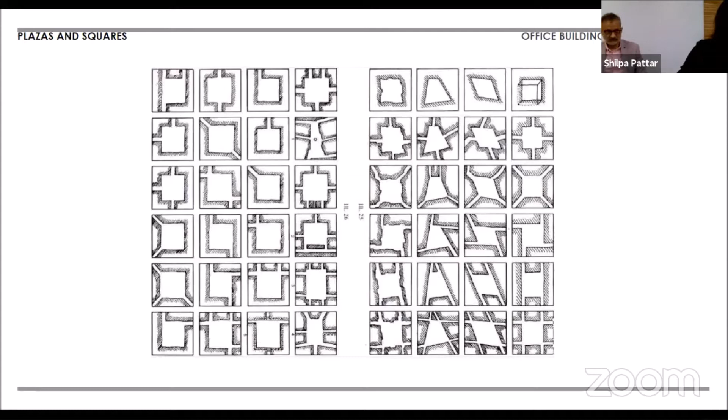It is reminiscent of old European town squares that house various activities like a borough market, pop-up food stalls, street performances, musical bonanzas, sport and cultural events, mini banquets, as well as informal outdoor Indian bazaars. Old European town key features like clock tower, town squares, sports zones, high streets, outdoor dining, and garden spaces were part of our design ideations. Sketches that were to scale with workable floor plates and areas are displayed here.

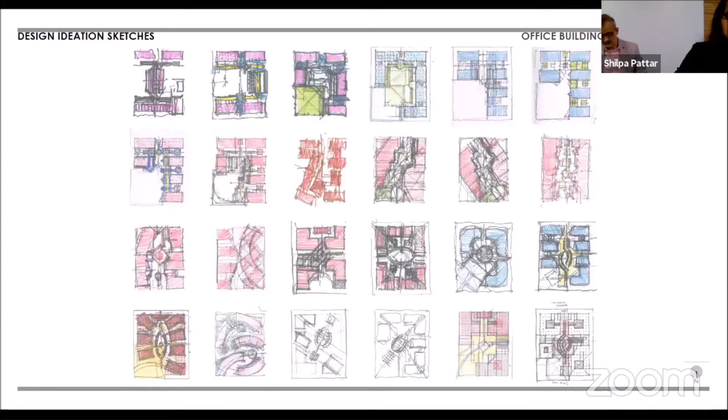So the final strategy consisted of 12 building blocks with varying heights, different facades, and peripheral buildings overlooking the central building terraces and buzzing activities on ground level as planned. That's the landscape master plan, capturing all the essence and medieval elements, textures, colors, and activities that we intended to involve.

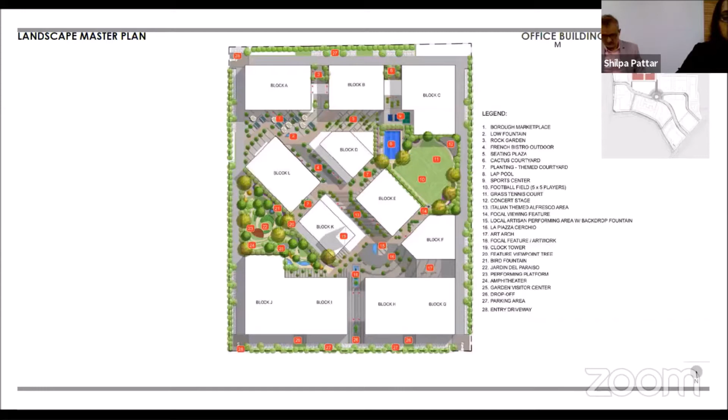So the site layout and the stats: located in the ETV campus Bangalore, the site area is around 14.57 acres and the super built-up area is around 2.4 million square feet, consisting of 12 blocks of varying sizes and height, the maximum being 1 to 10 floors. The vehicular movement is restricted to the periphery, which is a one-way loop, consisting of 5 ramps for employees that enter to the upper basement, and individual building blocks have drop-offs for VIP and specially-abled on the periphery.

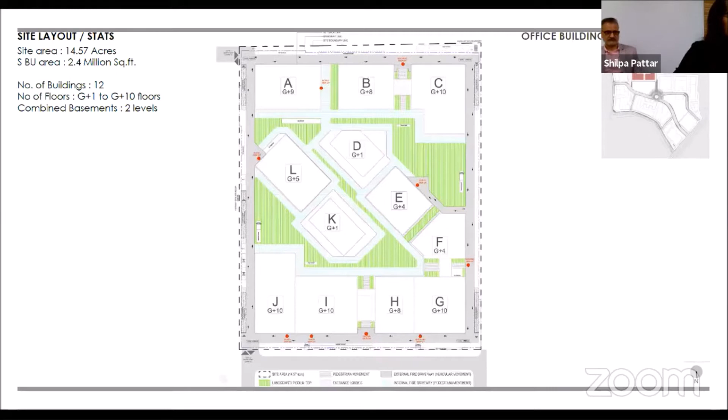The central spaces and space between the building blocks are dedicated to pedestrian movement and various activities along with fire tender movement. All the building blocks are interconnected with steel bridges from 2 floors and above on alternate floors, which was a fire requirement and which helps evacuation during fire emergency and creates an interesting multi-level movement pattern between the building blocks.

Block A, B, and C combined together generate 0.8 million square feet, which was phase 1 of the project, to be completed within 2 years of the approved concept stage.

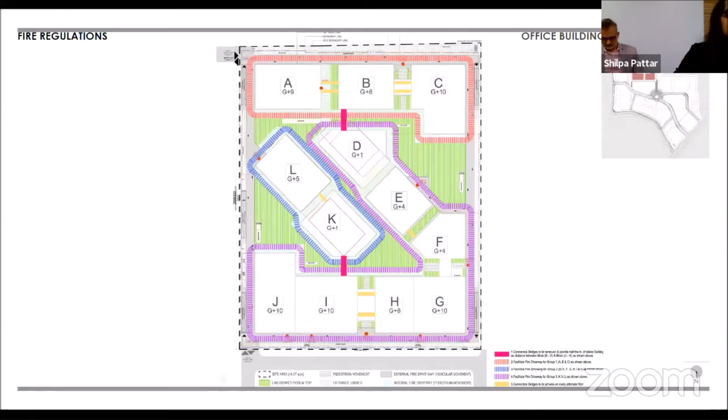Each block's floor plate size varies, and hence the placement of cores varies. Buildings with comparatively lesser floor plates are holding corner cores to provide efficient floor plate for office space. The lift cores are built in RCC, fire staircase in RCC, and the central stairs in checker plate.

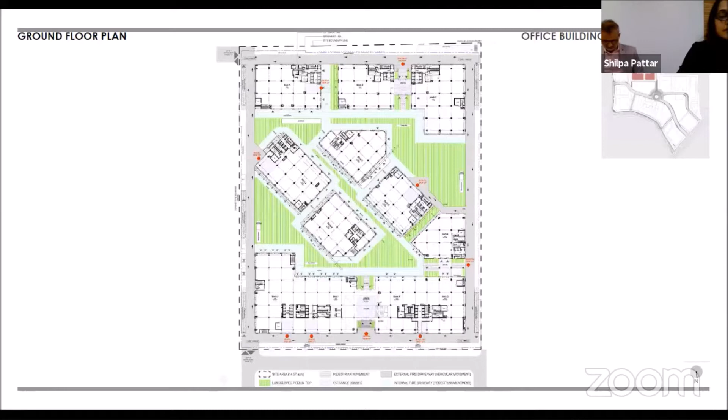The basement area extends to approximately 10 acres with 2 levels. The lower basement is around 6 lakh square feet, and the upper basement is approximately 5 lakh square feet. So each grid is 11 meters by 11 meters.

This is a typical section showing the bridge connection at alternate floors above the second floor, and the 2 basements, and the maximum height of the building is 46.1 meters.

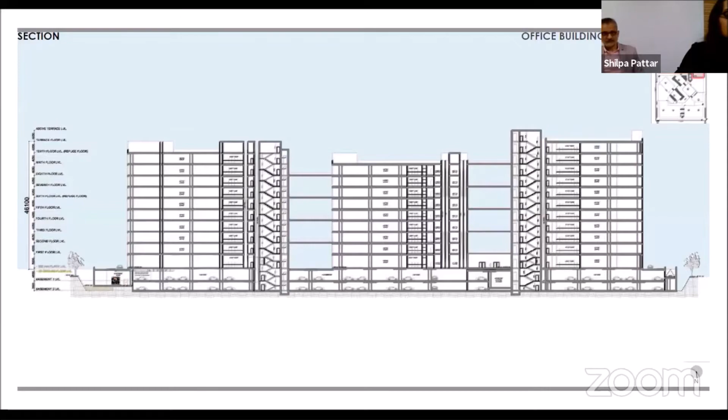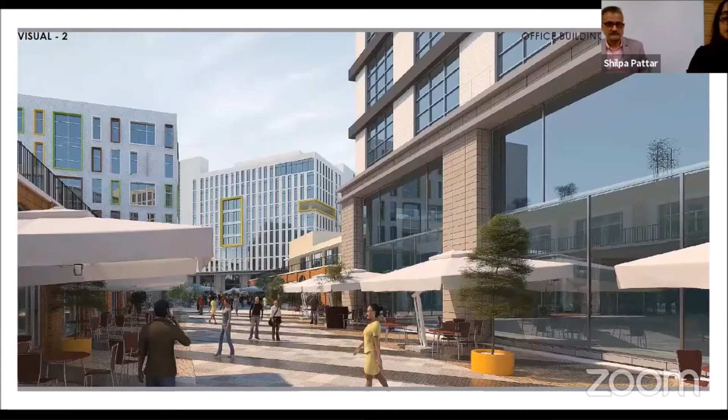These are a few visuals of the borough market, of the high street, sports zone, and the overall view.

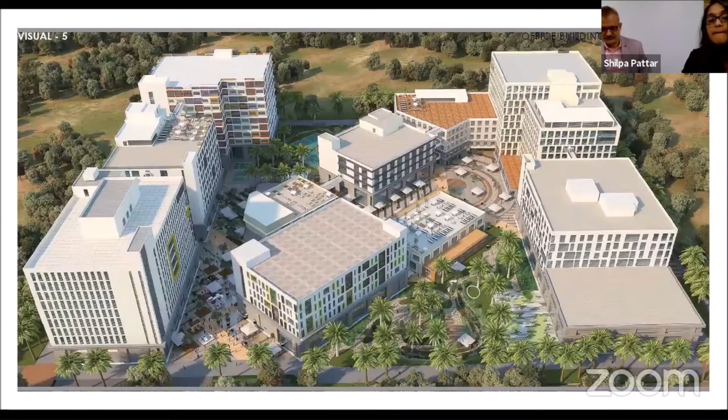So this webinar is about steel construction, so we will not take you through the design functionalities here, but we'll talk about why did we adopt steel per se as a construction methodology.

And probably Jatin, later on, Mr. Hariom will elaborate more on that.

But architecturally speaking, because we lost about 6 months from the signing in finalizing the specifications, finalizing the code, and also getting the approval done. And the timeline beyond 24 months was never extended.

Excuse me, there's some disturbance and we cannot hear you very clearly. Can you hear me now?

Yeah, a little better. So I was just mentioning that since the extension of time was not granted, we were forced to have a very pragmatic system which would ease us in meeting the specific timeline. So the best approach was to do the basements in RCC with regular RCC columns.

That would have taken us 4 months to finish that construction, considering it is a 10-acre basement here, but phase one is only about 1/3 of it.

The strategy was, as soon as we finished up to podium level, we should have the precast elements ready with us to immediately and seamlessly put the structure up on the buildings.

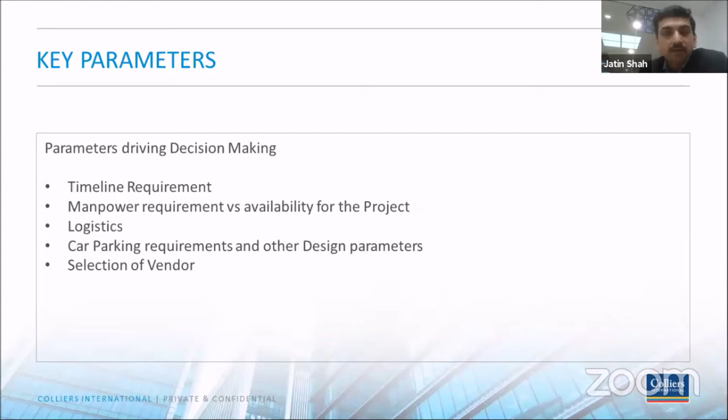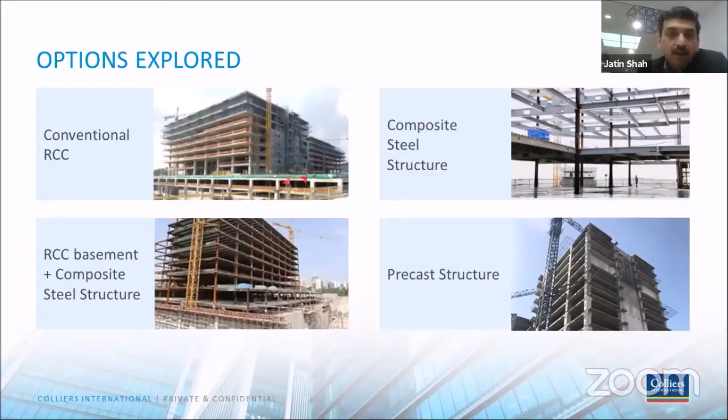An RCC basement, we were able to do it in 16 months because this was an atypical situation where the excavation for the project was completed. We were ready to start the foundations, and that's where, between the stakeholder and the developer, the discussions were going on whether to start or commence, the final level of discussions which were happening. The moment we got a go ahead, by that time our RCC drawings for the basements were kind of ready.

So we decided that we will not wait for the steel structure design to come up. We will take advantage of the site being excavated, and we will go ahead with the RCC works for the basement. And by that time, we will complete our design works, and then we will start taking up the steel structure as soon as our podium slabs are ready.

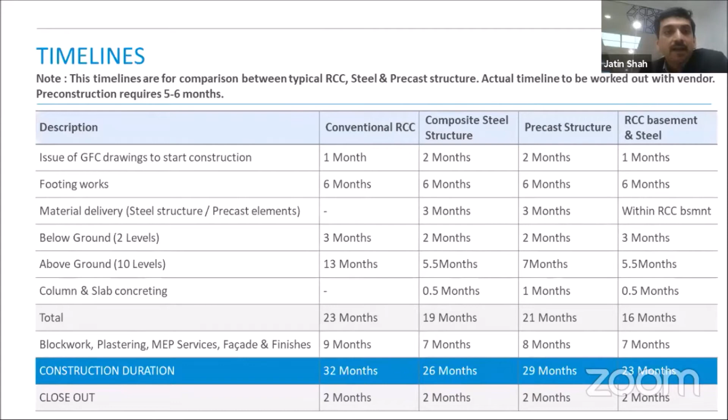So this decision led us to a constrained timeline where we took advantage of the situation, and by that we were able to finish the civil structure in about 16 months. That was a target which we had set, and overall completion of the project with all the services and facades getting into this realistic timeline, which was meeting the tenant requirement as well. So this was one of the important criteria, the timeline, based on which this decision was taken.

The skilled manpower requirement, the laydown areas for the steel structure, looking at the planning aspect that at no point of time the site should be deprived of material. It was not a just-in-time situation also, because we also had to cater to what happens in case there is a breakdown or some situation. So we always had to plan for at least a minimum of 7 days of material stacking at site to see to it that there is no disruption happening during construction.

The mechanization, which included the cranes, the hydras, the mobile crane, the stud fixing machines, the bolt connections which were required, which cannot be done manually, the level of quality checks needed both at the factory where production is happening and at site, and of course emphasis on what kind of fire treatment this structure would require to comply with the important codes. So these are certain hard data which I'm just projecting to everyone here.

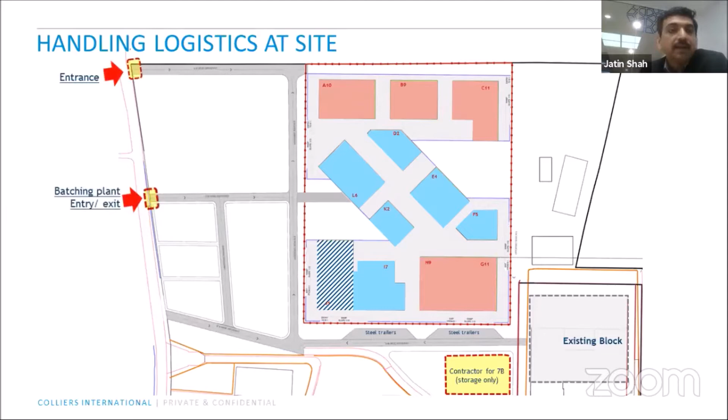The logistics, the way this was handled at site. We had an entry point. We had a dedicated entry for the batching plant material movement because of the capacity of concrete required day in and day out. There was pouring of concrete happening. We had planned a dedicated exit. So at no point of time there was a cross, or any stoppage. There was always free movement happening. So this was how it was all planned out.

And reaching the project site itself, we had planned for tire cleaning. There was barricading which was set up. We had planned for four batching plants, but eventually we ended up having one 60 cubic meter plant and one 30 cubic meter plant at this site.

So the vehicles and materials could just move in and come out of this campus. We had shuttering and other storage yards designated for the RCC works, which was going into the basements. We also had a laid down area of about close to 2.5 acres for the structural steel, which was supposed to come in and be unloaded, as I mentioned, maintaining a 7-day stockpile here.

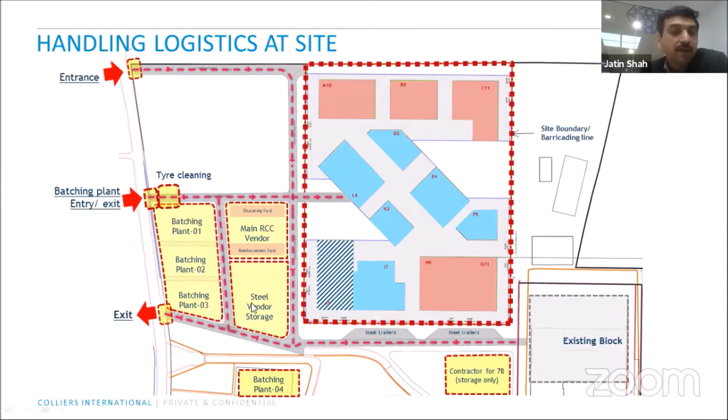Apart from that, we had about 12 tower cranes, in addition to a mobile hydra crane of a very high capacity, about 60 metric tons. We also had 3 hydras to lift the steel from one location to another and help transport and lift it up to the required location.

One big point I missed, which Mr. Hariom will also cover, is that for the first time we experimented with an M80 grade of concrete, which we had never used before. This was used for the first time in this campus, in this building, to help the structural designers bring in the efficiencies required for the project. We had a lot of confidence in our design team, and that's how we proceeded with this kind of mixed structure, which is RCC in the basement and composite steel above.

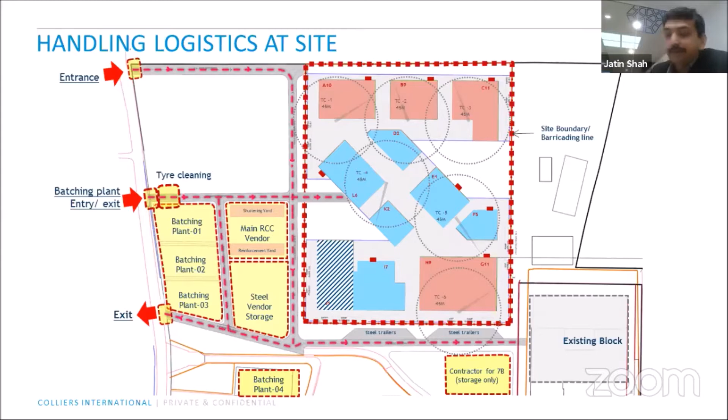We also had a Promat and Berger combination here, which is a UL approved, intumescent paint applicator, who helped us make sure that this fireproofing treatment was happening in parallel to the construction going on at site.

I would show you some project progress photographs. It gives you a fairly good idea about the kind of work happening in this massive 14-acre project site, where at every location something was happening, and every day in one block either the deck sheet was being laid, or columns were getting erected, or foundations were being done, or concreting was happening above the deck sheet. So the sequencing, the planning, and the type of selections we made eventually helped us a lot to reach this level.

There have always been lessons learned in any project we do, and just a few aspects of that, which we can discuss after Mr. Hariom finishes his presentation. One is provision of sleeves during the design stage. You would have seen in the video how neatly the firefighting pipes were routed, by using sleeves we were able to take advantage of that on the height issue. We would also recommend that in future, when a steel structure is being designed, a BIM consultant will possibly play a very important role, because then your coordination aspects are resolved on day one, and it's not left to be resolved as a site issue.

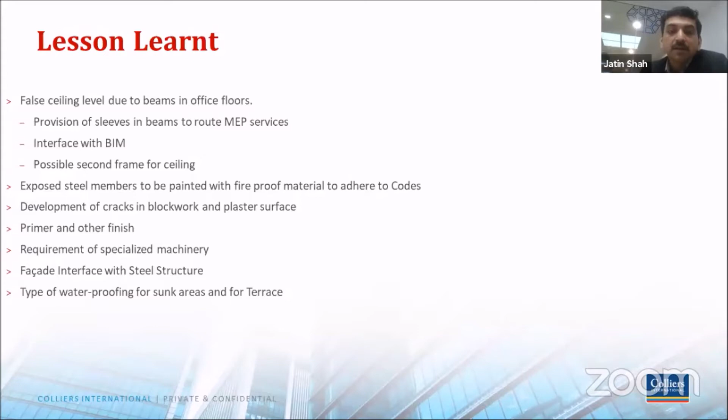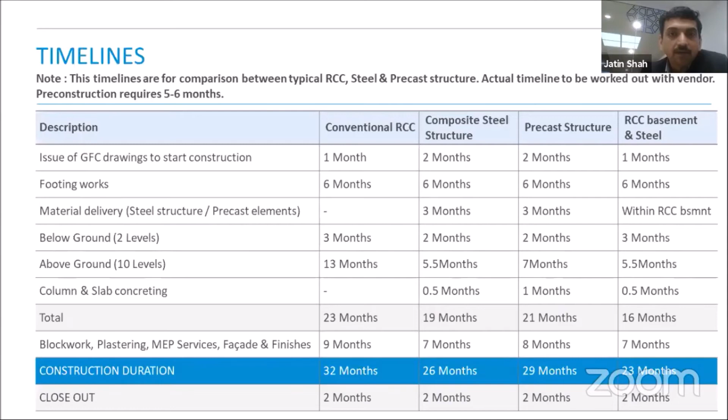In this project, we had lift cores and columns in MS structure. The staircases eventually had columns and stringer beams coming in MS, but we also used precast here because the contractor was more comfortable with that. This kind of arrangement possibly makes the structure consultant happy because it helps them. But again, I'll leave it to Mr. Hariom to take it forward.

I'll be open to any kind of questions, which I'll be happy to answer. Over to you, Mr. Hariomji.

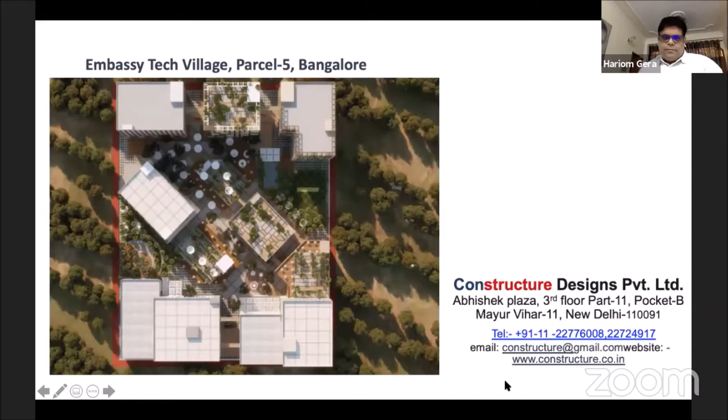Hello. Yeah, Hariomji, your voice is audible. Please go ahead. Actually, this presentation is not working. Is your presentation freeze? Then what you can do is unshare and share again. No, okay, great.

Project brief is already discussed by Mr. Jatin as well as Mr. Anshu. Now I am discussing the structure of the project. The structural system we have taken, because this building is in zone 2, we have taken OMRF plus ductile shear wall.

For one building, we have tried the ordinary moment resisting frame, steel bracing, and ductile shear wall. The primary frame grid is typically 11 by 11 meter, and this 11 meter is divided into three, so the typical span of the deck sheeting is 3.7 meter. The approximate consumption of structural steel is 9,900 metric ton, and reinforcement approximately 14,000 ton.

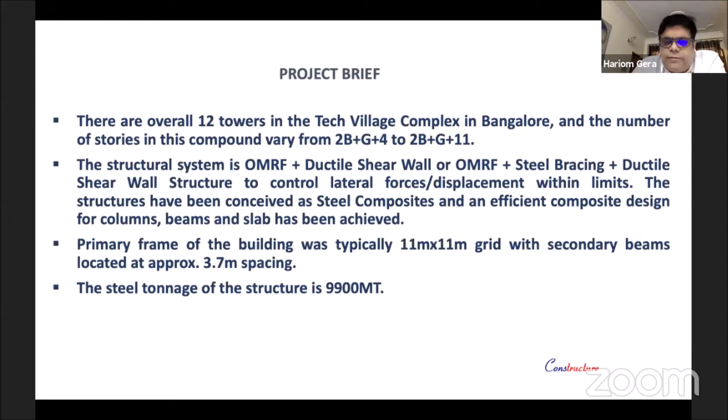Any composite construction is divided into two parts: first is the pre-construction activities, and the second is the construction activities. In the pre-construction activities, the main role is project scheduling. Somebody asked the question - we delayed the project 6 months because of the planning. That's where planning plays the leading role in composite or steel construction.

Design as well as material selection also goes with the speed. This is the material selection - Mr. Anshu and Mr. Jatin also said that the facade system is not going with the speed of the steel. That's why after the Flipkart we advised the client. Generally you will choose the facade as a structural glass facade, or any precast system which can match the speed with the steel construction.

Third thing is the fabrication drawing. After design, we go to the fabrication drawing, and the fabrication drawing goes to fabrication. Fabrication plays a very critical role because in fabrication we require at least 3 months to get the material at the site. So proper project planning is required.

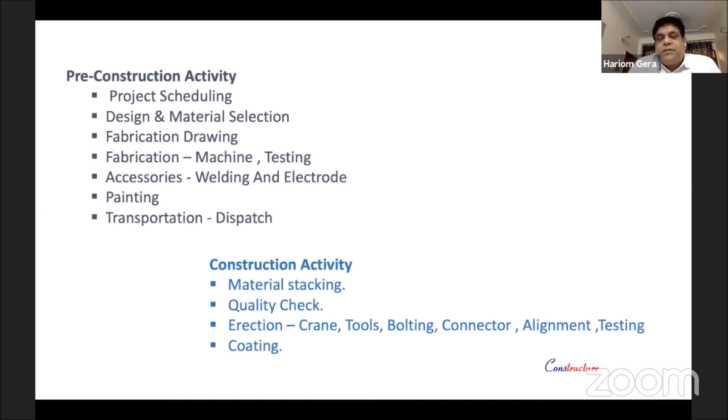After the erection of the building, we start the coating at the site. Intumescent coating - there are two types of intumescent coating, which we can explain later.

This is the master layout of the total Embassy Tech Village Parcel 5. There are a total of 12 towers, from G+4 to G+11. This is the first floor typical arrangement, and we started the steel construction from the first floor, not the basement.

Up to the basement, we used flat slab concrete construction. The approximate basement size is 280 by 280 meters. This is a total single basement without expansion joint, and there is no leakage after construction.

In the 280 by 280 meter RCC construction, we eliminated initial shrinkage by providing a shrinkage strip, and for final shrinkage, we increased the reinforcement.

There is a 40 ton bearing capacity for this project. So almost isolated footing is used for the total project, because the project height is maximum 2 basements, G plus 11 stories. We used combined footing and isolated footing.

Then the material grade - we used concrete grade M30 to M80. M30 is used for the deck slab, and M80 generally for encasing of the column. Due to M80, we reduced the column size to around 750 by 750.

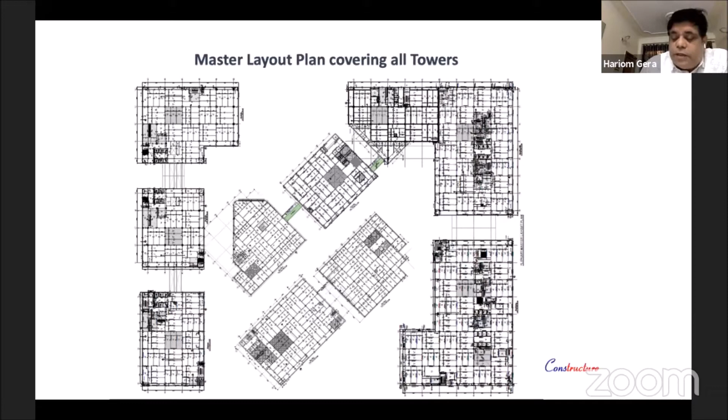After completion of this project, since Embassy is doing this type of project for the first time, they wanted more confidence in it. They wanted to test one slab for the original loading. Whatever the final loading, we tested the slab after 28 days of concreting. Everything went as per the code - whatever the recovery, whatever the deflection, everything was under control. That's why the client is confident.

This is the typical tower framing, Tower B. We placed the columns in an 11 by 11 grid, and placed 2 beams in each grid, staggering the beams. One grid we have vertical, and the second grid going horizontal. Third grid again vertical, fourth grid horizontal. By this, the load on the primary beam is equal in both directions. That's why the depth of the primary beam and secondary beam comes out similar.

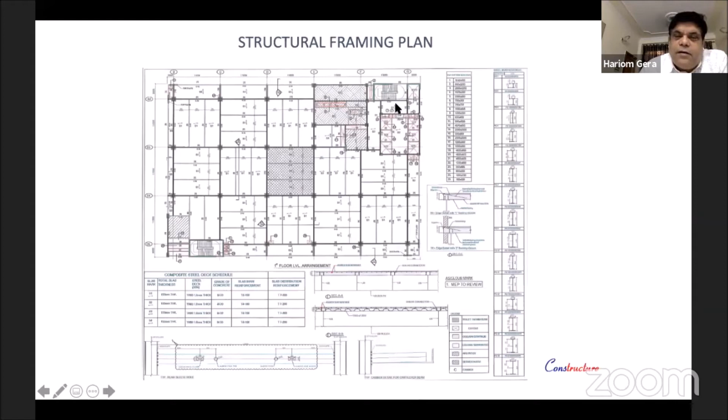And there is the core wall in the corner. This minimum core wall is required as a ductile shear wall for the lateral resisting system.

This is the tower D framing. This is the incline that I am showing, because there is an incline in the plan. We can go with steel also, any type of framing.

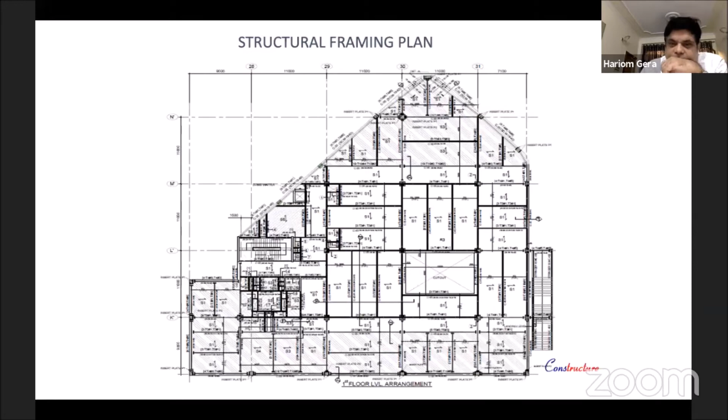This is the block F framing, which is also an incline. This is the IJ block framing, and here we don't have much shear wall. As seen before, not much shear wall, that's why we are placing bracing here, bracing at the corner to control the drift as well as the deflection.

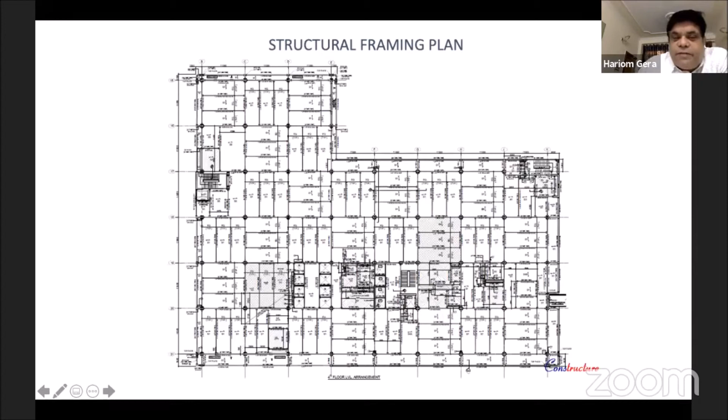This plan is showing the typical layout of the sleeves for the services. We have given 5 openings in the one beam for every service, like firefighting, cabling, everything. These are the sleeves we have planned in both directions with the same length.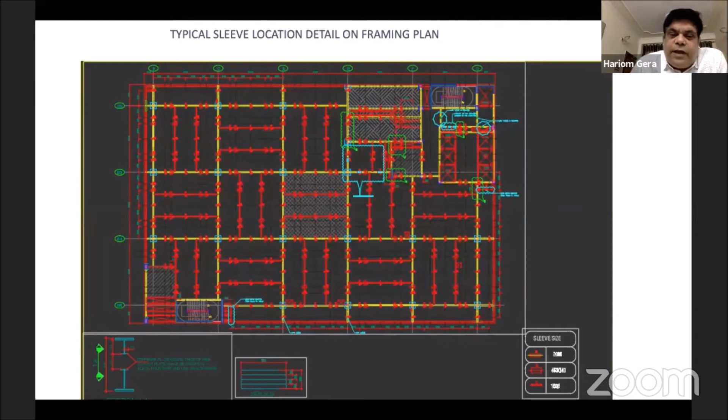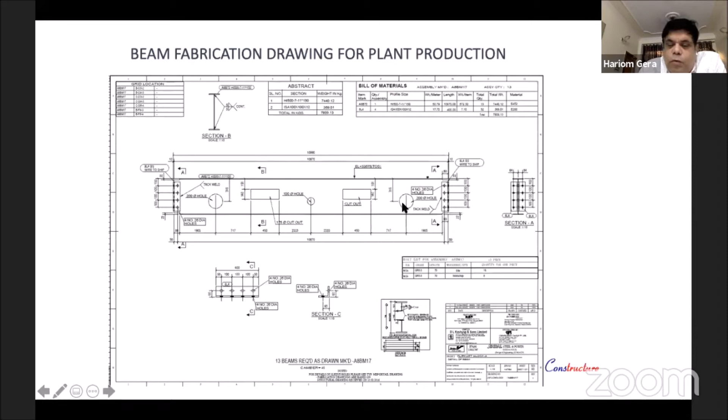This is the typical layout of the opening. There is the 1, 2, 3, 4, 5 plan, and we are staggering this opening so there is no overlapping, to avoid the overlapping.

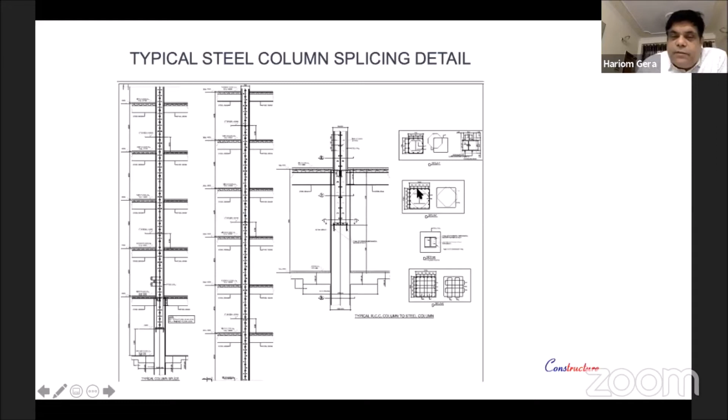Hariom ji, you got only 5 minutes more. Okay sir, not an issue.

This is the electrode classification. Electrode classification is generally confused in the market. This is a frequently asked question, which electrode we have used.

This is shown as per the AWS classification. This E represents the electrode. The second digit represents a number multiplied by 1000 or multiplied by 10, which gives you a KSI value. Third is the position, fourth is the flux type. Generally E7018 is what we use.

7018 means 70 KSI is the strength of the material, and the electrode we are using is 1.2 times the yield strength of the parent material.

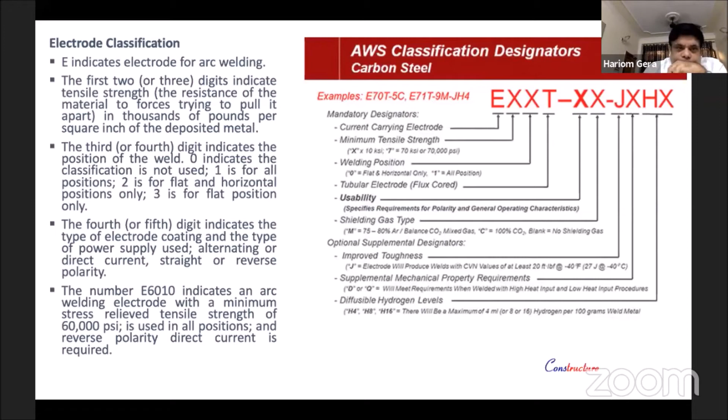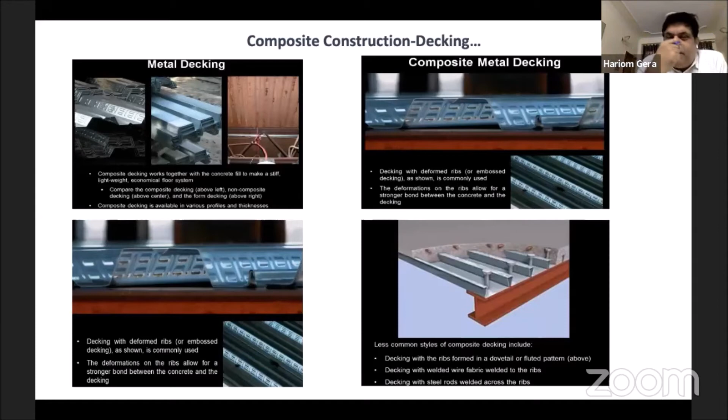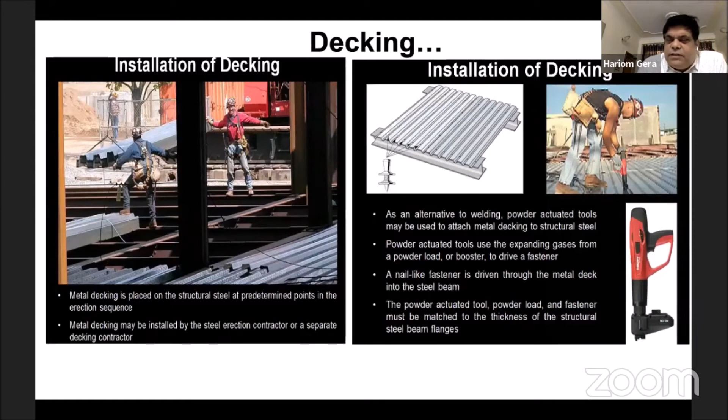After the decking, we can install the shear stud by the stud welding machine. This is a typical stud we have used, installed by the stud welding machine.

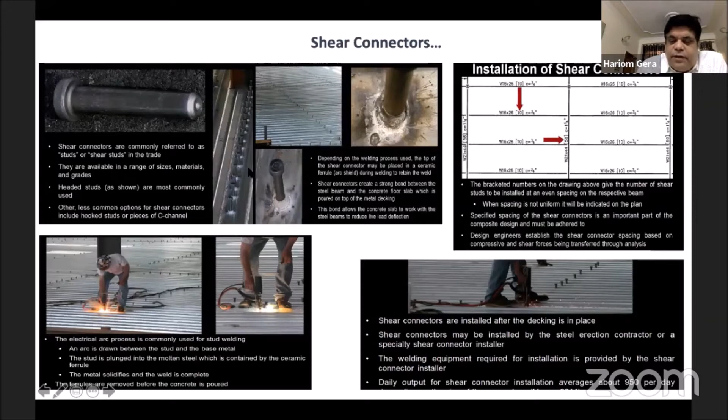Then we go with the installation of concrete. Sometimes during installation of concrete, an error is done at the site - they pour the concrete and create a lump of concrete at one location. Due to this lump of concrete, sometimes deflection occurs under the deck sheet. So you must ensure the concrete mass is spread and not stored at one location, to avoid deflection in the deck sheet.

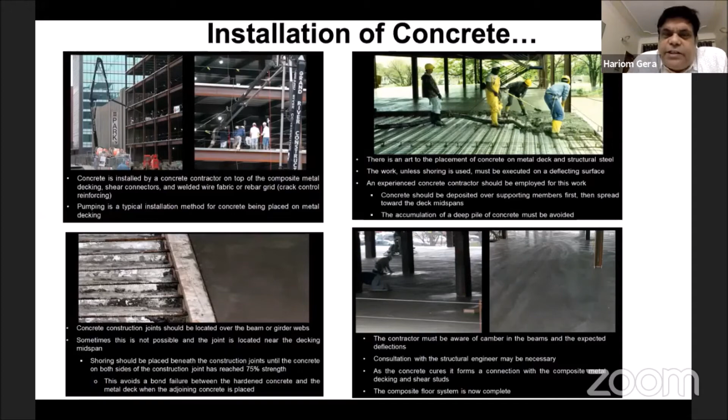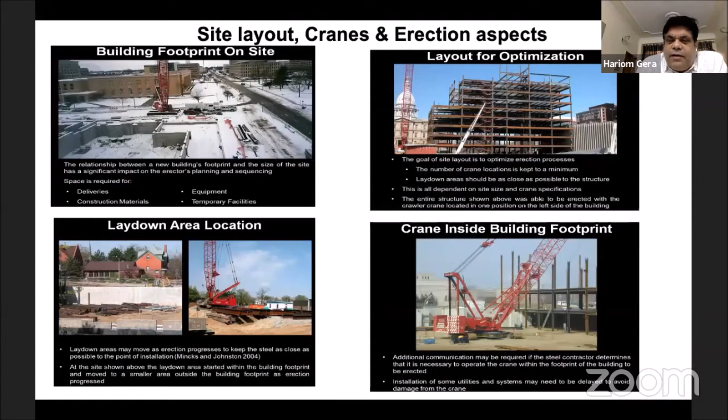Then you have this crane. There are a number of cranes available in the market. We have used for Flipkart one mobile crane and 12 tower cranes, and for high rise structure we are using the crawler crane.

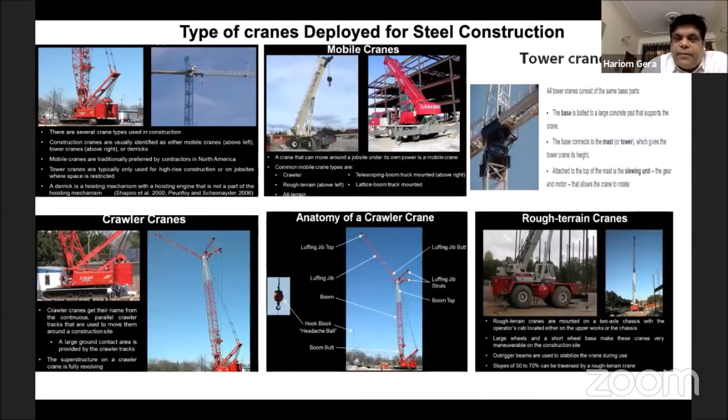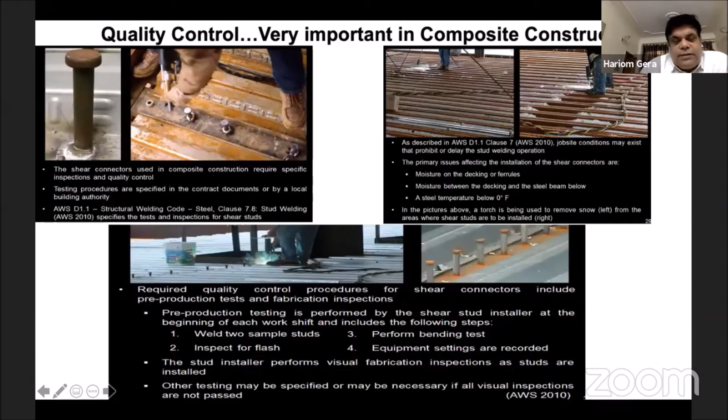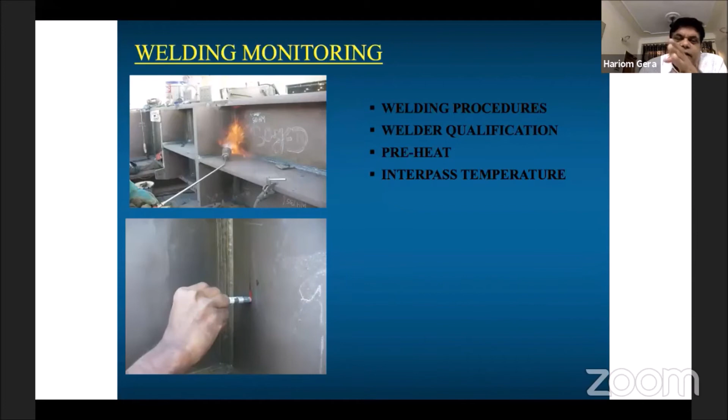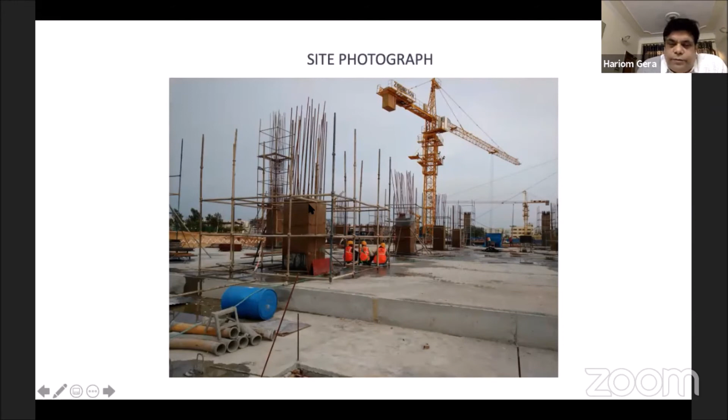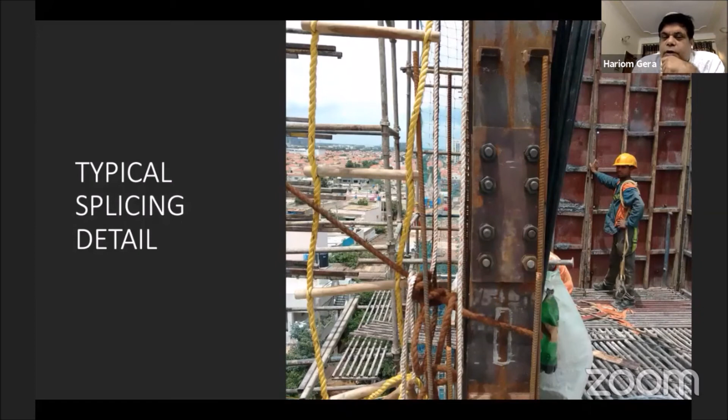This is the typical splice detail. Generally we have placed the splices at 1.25 meters so that any labor can do the tightening easily over there. This is a photograph.

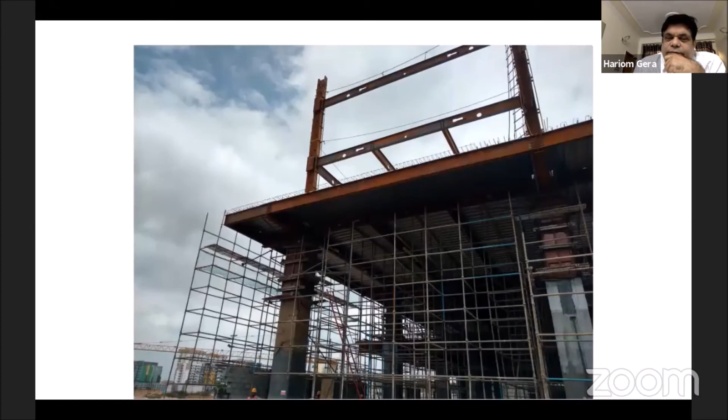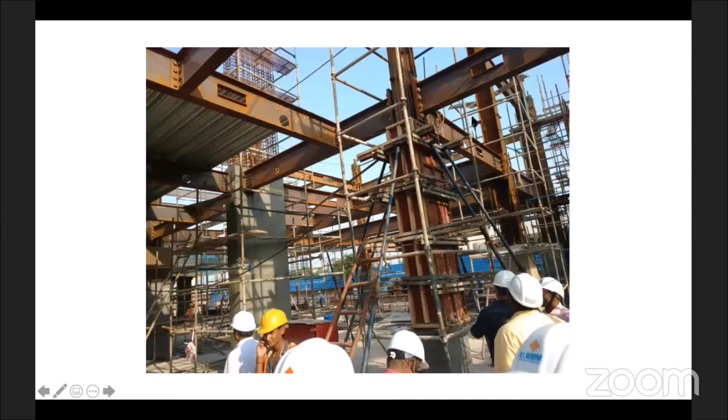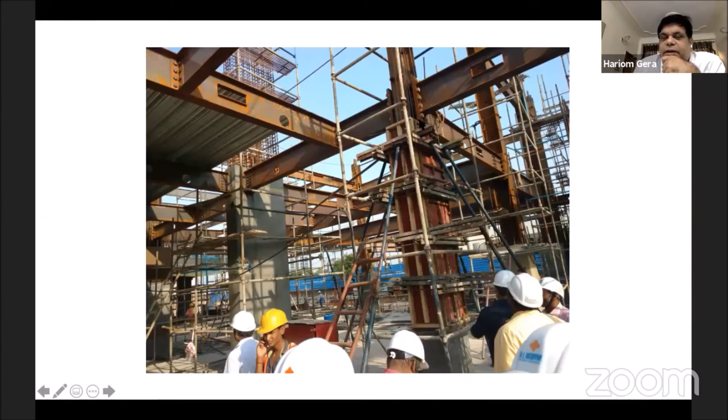This is typically moment design. We have designed this movement as an ordinary moment resisting frame. My end plate is there, and the one stud we have taken from the web. My end plate is stuck on this web, and we have connected and bolted it there.

Hariom, can you make the concluding remarks, please? Yeah sure sir, this is only 2-3 minutes, sir. Only two, three photographs.

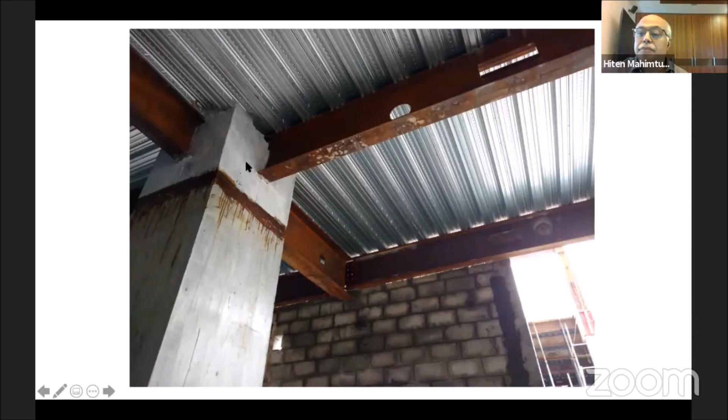This is a junction of the RCC column plus the steel beam there. This is the stud over the beam.

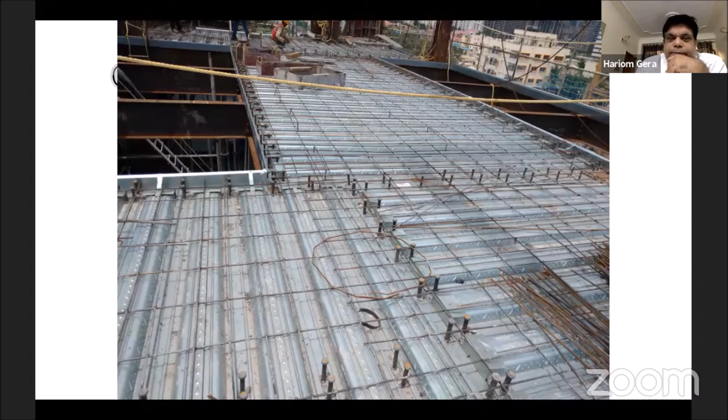This is the placement of the reinforcement. We required only top mesh for the deck sheet. Only for bottom mesh, the deck sheet gives the sagging moment capacity, so we require top mesh only for the hogging moment capacity. And this reinforcement is required for the fire rating also.

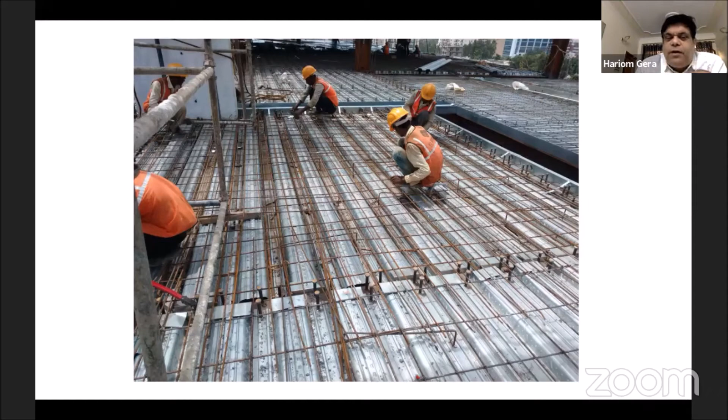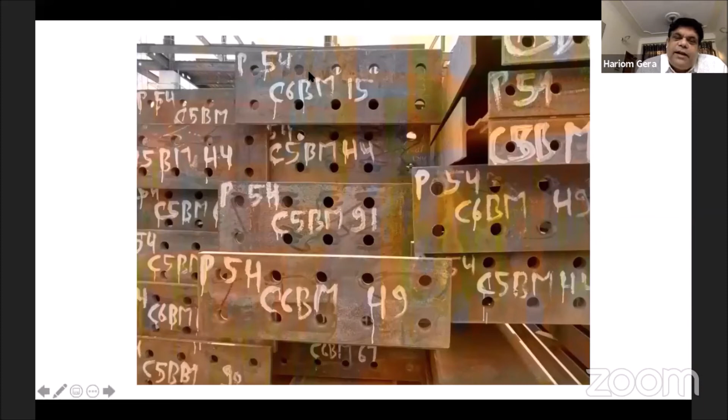We are checking, we are lifting the beam or column by the crane.

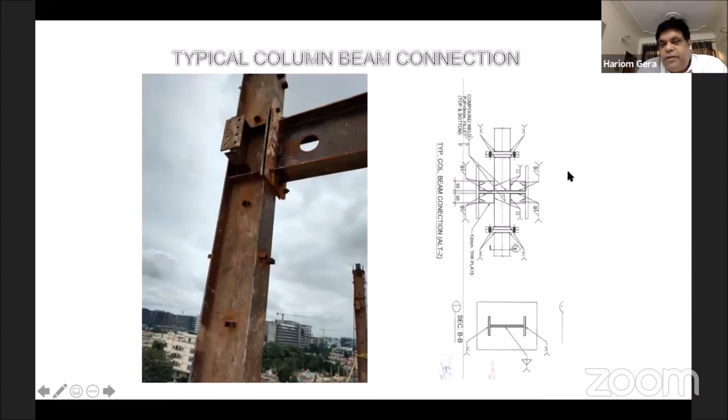This is a typical junction from the moment connection, their moment connection. This is again the moment connection. This is the typical detail of the moment connection. This is the column; on both sides we have done the moment connection.

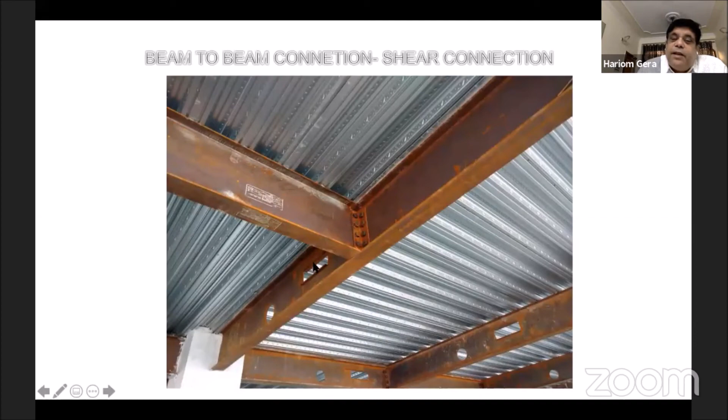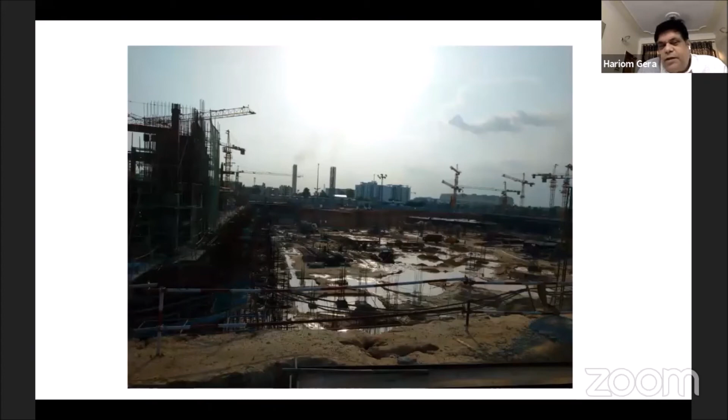Thank you, Matthew. Any questions? Thank you, Hariom. Thank you very much. I think Andrea, you want to say something before we start the Q&A session?